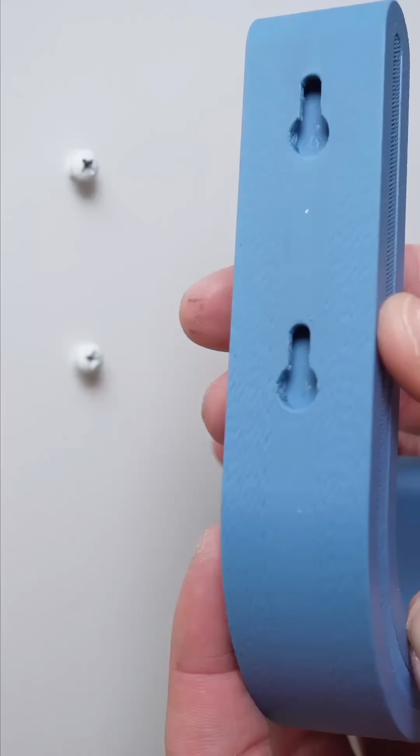Here's everything I know about designing stuff to flush mount on walls. I start off by measuring the diameter and the height of the screw head as well as the thread diameter. Next, I dimension a construction line where I want the keyhole. Then I use a center to center slot to make a slot that's the width of the screw thread plus about 0.2 millimeters and around 10 millimeters in length.

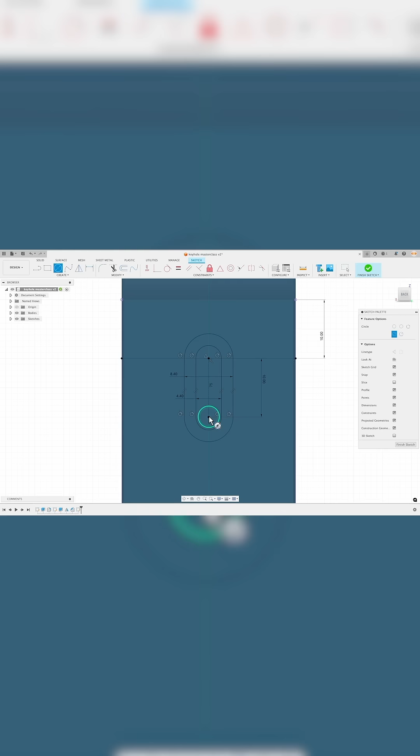After that, I add another slot on top of the first slot that's the diameter of the screw head plus 0.2 millimeters. To finish the sketch, I add a circle at the bottom that's the size of the larger slot, and then I extrude out the bottom circle and the smaller slot, the height of the screw head plus 2 millimeters, which is 5 millimeters in this case.

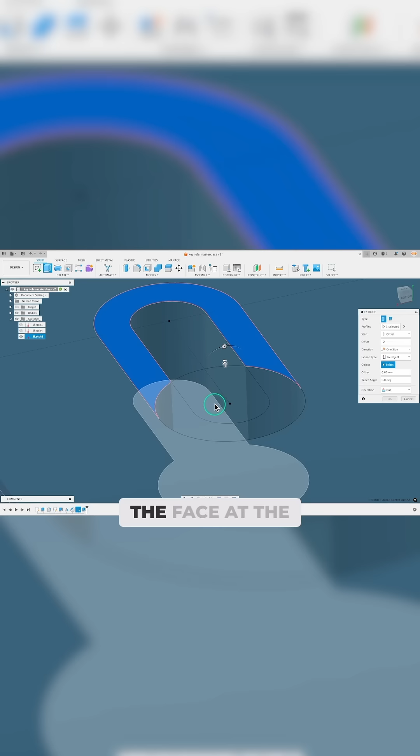Then I select this outer profile, change the start option to offset, make the offset -2 millimeters to leave a 2 millimeter thick wall, change the extent to object, and then select the face at the bottom of the slot to cut down to the bottom. This creates the cubby where the screw head will sit.

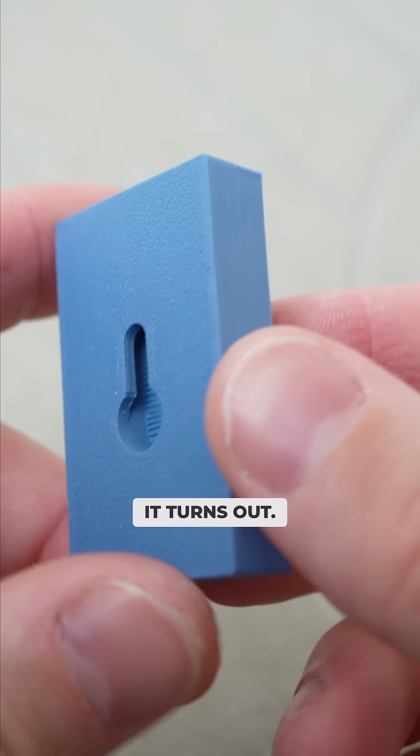If the keyhole is against the print bed like this, I just print it without supports. And here's how it turns out. I recommend extruding out an extra 0.2 millimeters at the bottom since there's a little sag with bridging so it won't be too tight.

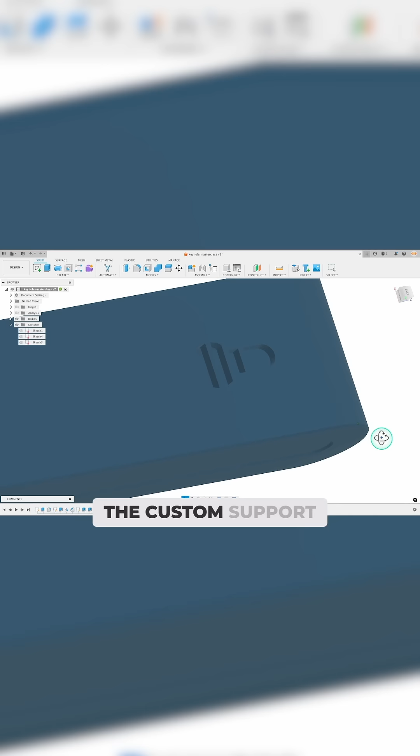If I'm printing a part on its side, I could use tree supports just on the edges like this, but instead I use custom supports that I make by creating a rectangle across the bottom hole, extruding the rectangle the thickness of the wall, and then making a rectangular pattern to pattern the custom support across like this. Here's 3 sample prints. One without supports, one with tree supports, post removal, and one with custom supports, post removal.

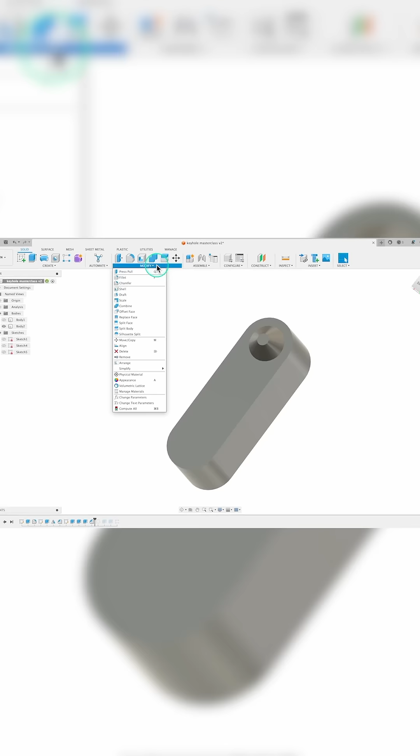I also make this by adding a small circle at the center of the small slot and extruding out a separate body, making sure that I select new body, and then extruding a 1 millimeter tall cylinder from the small circle and chamfering it. At the end, I use press pull to add 0.1 millimeters of slack so it won't get stuck. Now I can put the little part in the slot, add some lead, and make a mark where I want it on the wall.

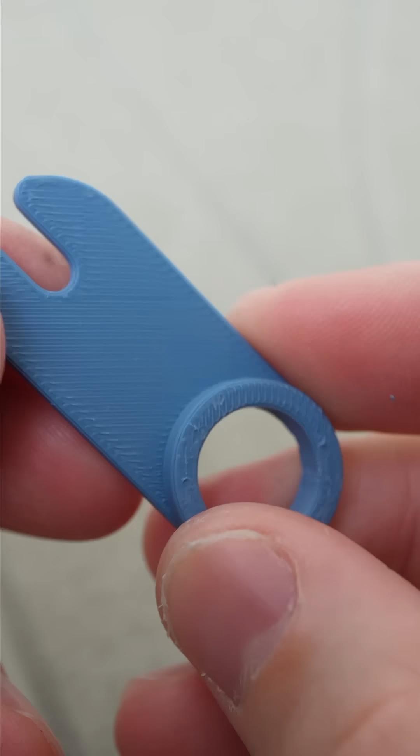And to make the screw the perfect depth, sometimes I make these little screw height guides. Here's how. I create a big slot about 30 millimeters long and 20 millimeters wide, and then I make another slot from the outer edge of one end to the center point. I make this slot the width of the smaller slot from before.

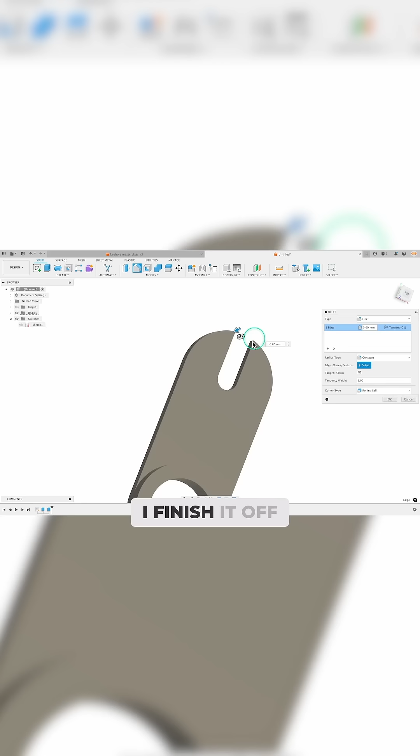To give me a place to grip it, I add a couple circles here to make a ring. Then I extrude out the wall thickness of 2 millimeters and add some extra height for the ring. I finish it off with the fillet here and chamfers on the edges like this.

And for keyhole sizes I use a lot, I make a negative like this. Using the small profile as the keyhole, I extrude out the small slot and circle the wall thickness of 2 millimeters, and I extrude the whole profile the height of the screw head in the opposite direction.

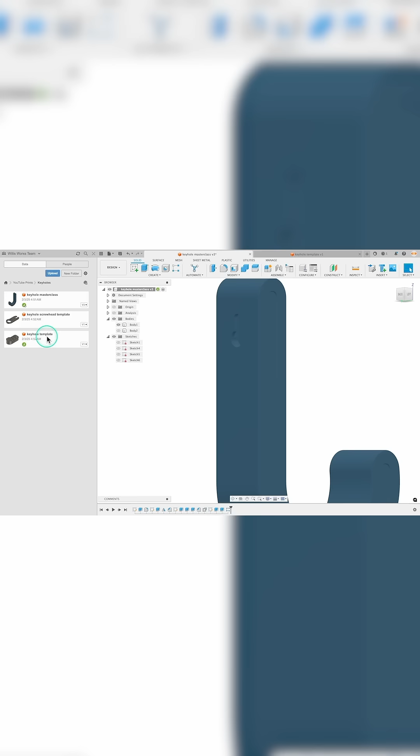You can even do the custom supports the same way as before, except cut away the rectangle this time since it's a negative. Now anytime I need this keyhole, I just insert the component, unground it, position it using a joint, and cut out the body. Hope this helps.